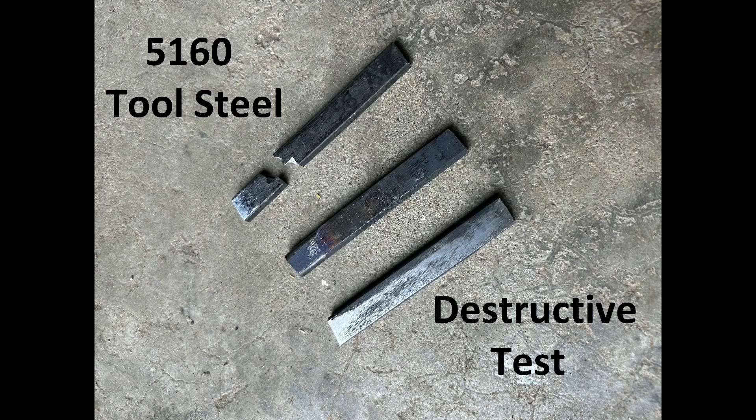Today I'm going to test out a preferred steel that I enjoy. I like 5160, an alloy steel, and I cut 6 pieces out of it. They're all going to be the same size.

They are all going to be annealed and normalized, and then I'm going to quench them in water, Parks 50, and regular canola oil.

So with those, after I quench these, I'm going to test the hardness after it's been quenched, straight quenched, and then I'm going to test each one after it has been tempered. The tempering will soften it a little bit but make it a little bit stronger.

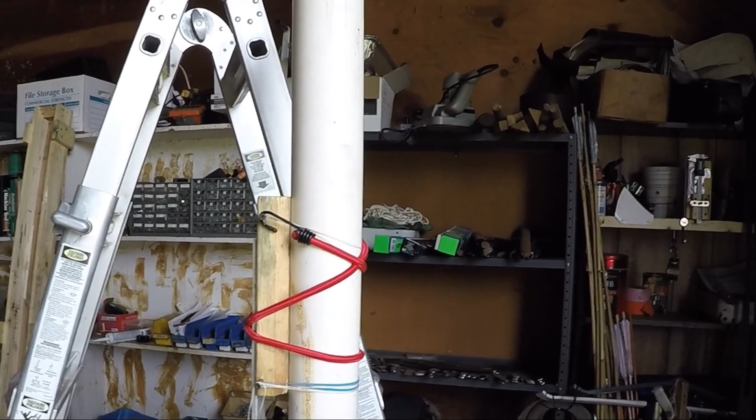After that, I am going to put it in a mechanism I tried to make here. This is just a PVC tube, 2 foot long. I can mount the steel here, and I'm going to put a 10-pound weight down the tube, and it'll hit the piece, and we'll see if it breaks, and then we'll analyze it a little bit more.

So that's the plan, and we'll go on to the heat treat part. We'll see you in a bit.

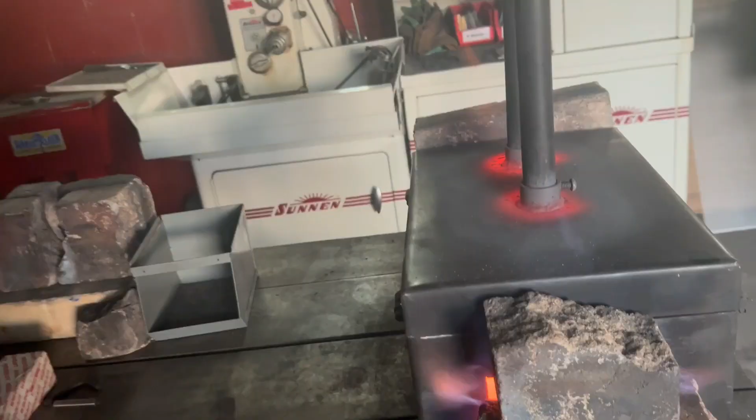We did a set of normalizing first, and now we're going to do it in anneal. We got our 6 bars in there, and we're going to let those finish heating up. They look pretty good inside there. Going to turn it off.

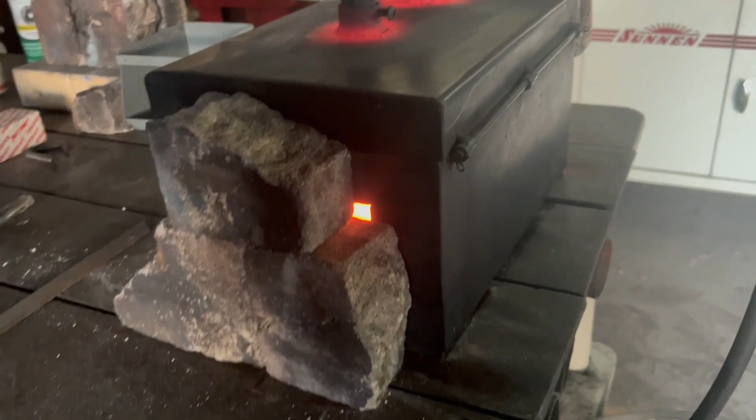We'll let that anneal, cooling it all the way down until it's room temperature, and then they will be annealed. And then from there we'll do some heat treat. So there's our annealing and normalizing process.

Normalizing: put it in, get it up full hot, put it out, let it cool on the table, put it back in, and then let this cool down inside the furnace so that it slow cools. And then we'll proceed to do some heat treat.

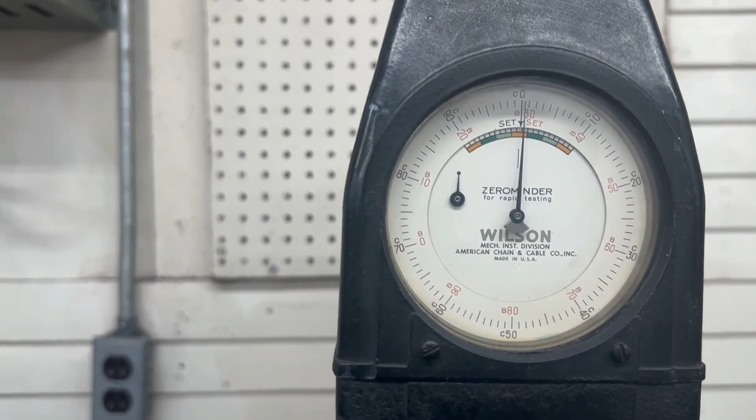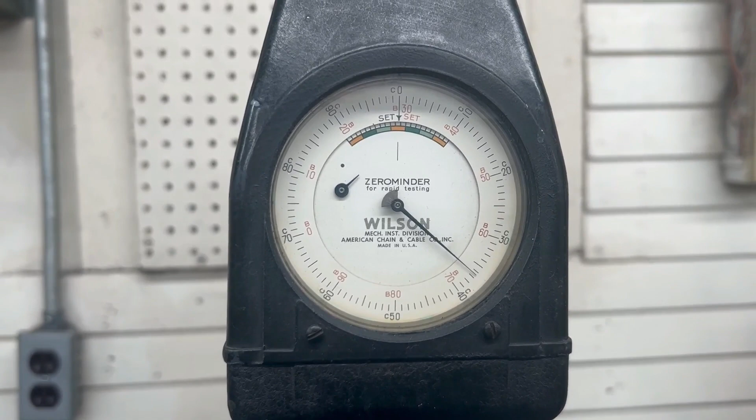So I annealed the 5160, and we're going to Rockwell test it right here. We're looking at about 36 Rockwell right now. That's soft enough to machine, and then we'll harden it up and see what it gets to.

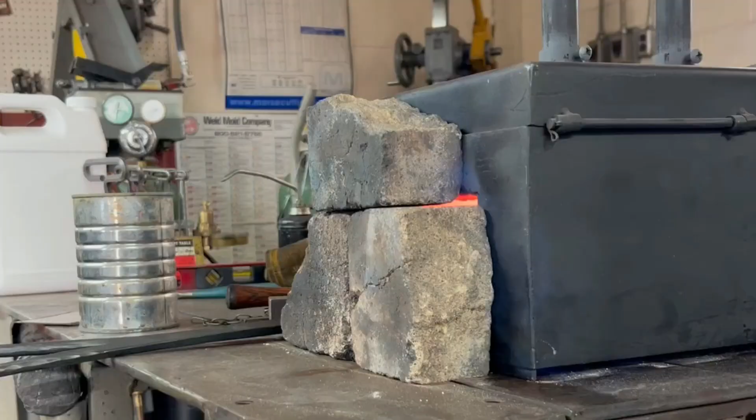Quenching in canola oil. Quench in water now. Gonna quench in Parks 50 quenching agent. Second one - check this one with a magnet to make sure.

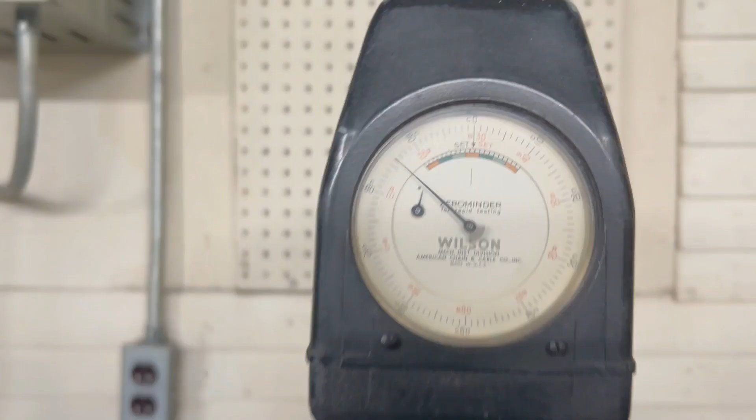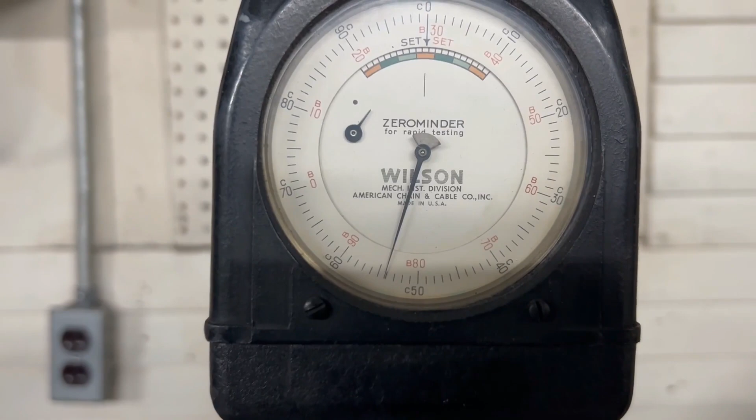Quenched in water, looking at about 58 Rockwell. Quenched in canola, looks like we got 54 Rockwell. Did the Parks 50 quench with the 5160, we're looking at around 58, 59 Rockwell as quenched.

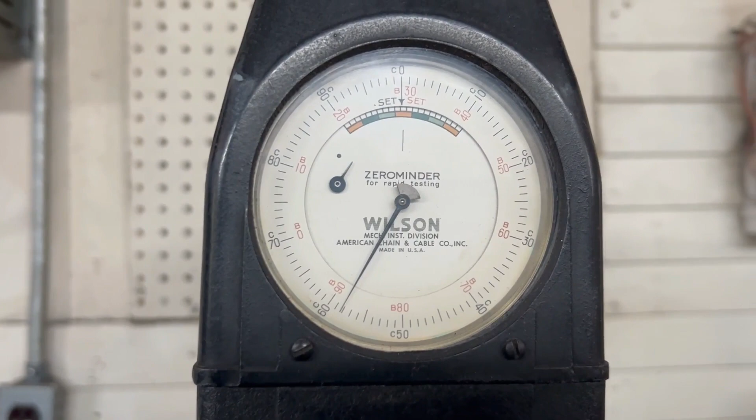Doing 3 sets of tempering at 450 degrees, 1 hour apiece, on the water quenched and the canola oil quenched. So we're going to test the Rockwell hardness after those are done in the tempering furnace.

375 degree tempering for the Parks 50 quench. You see there we got 375. And we'll give that one a good temper for 1 hour.

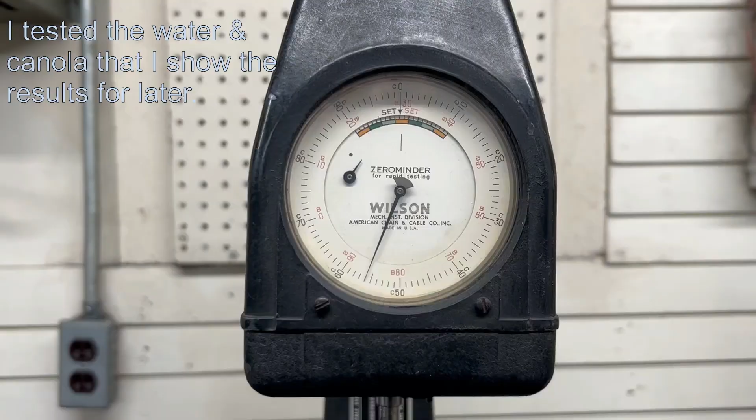Parks 50 after tempering at 375 in the toaster oven, I got a Rockwell of about 56. So that would be our end result on the Parks 50.

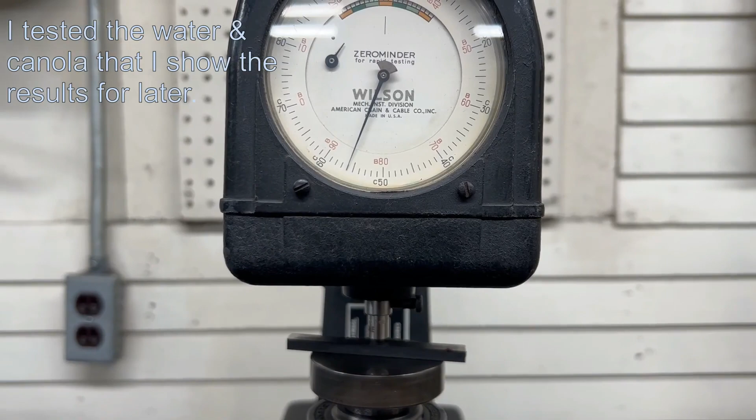So this is an overview of what we did. Again, these were water, these were canola, and these were Parks 50. Parks 50 is a preferred quenching oil that has a 7 to 9 second time for reducing the heat in the steel to get you the right hardness.

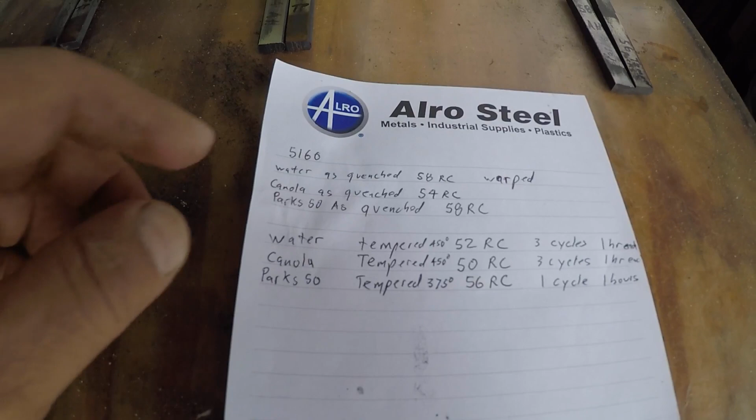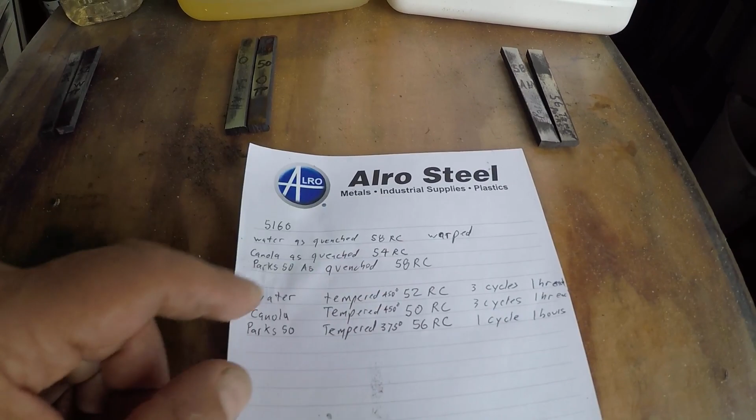So this is the data, if we'll be able to read this. The as-quenched water was 58, canola as-quenched was 54, and Parks 50 as-quenched was 58. The water warped, the canola oil didn't, and the Parks might have warped a little bit, not as much as the water. Water is not a preferred method for this particular steel.

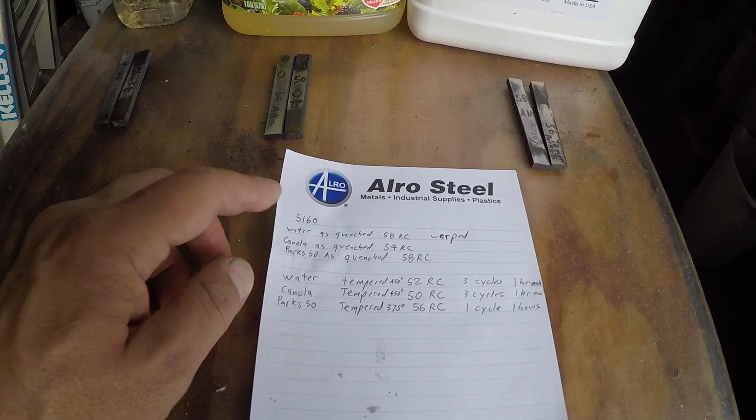5160 will crack or flex too much and you'll have problems, but I did it anyways just so we can analyze the differences.

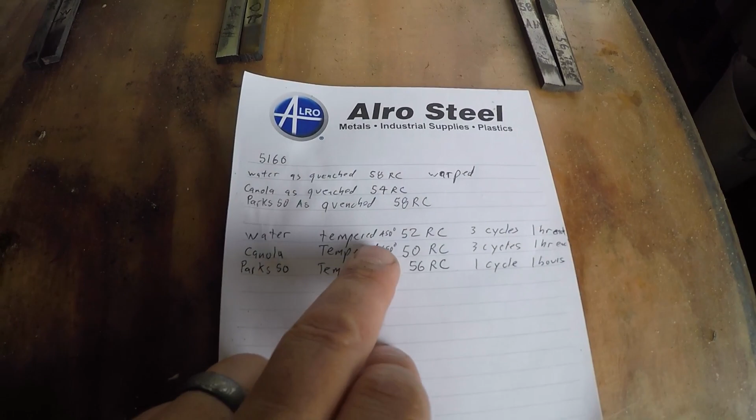Afterwards, I tempered it. I did these slightly different, but water I did at 450 and that ended up being 52, with 3 cycles of 1 hour. The canola tempered at 450 came out to be 50 Rockwell, also 3 cycles of 1 hour.

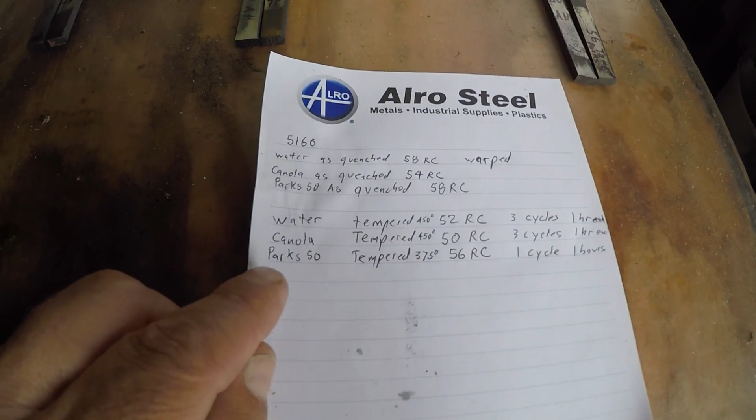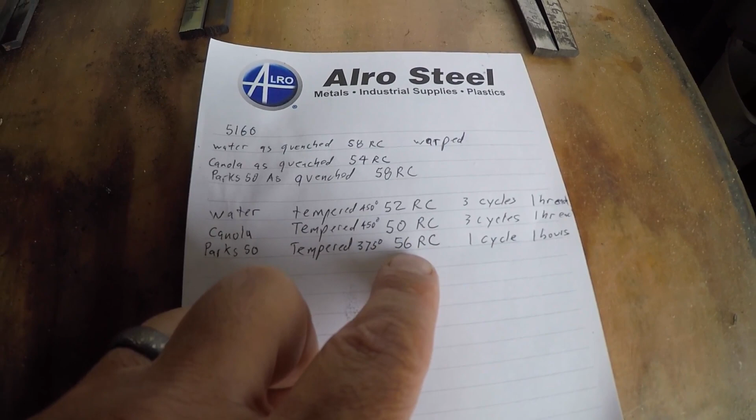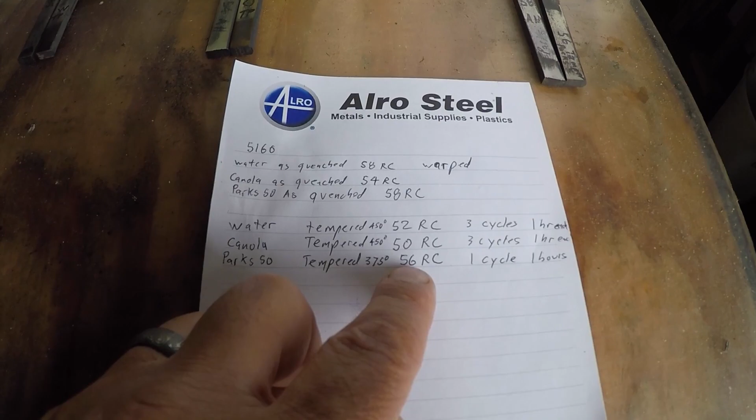I reduced everything to more reasonable numbers. For the Parks 50, I did 375, and that came out to be 56, which would be more of a preferred hardness for any kind of knife or machete. It's still a little bit low if you want a real hard knife to keep a sharper edge. I did 1 cycle on that for 1 hour.

But we're going to go back and we're going to test to see how all 3 of these break or don't break, hopefully, and we'll come up with that.

Okay, here's our first test. This is the water as-quenched without any tempering. Here we go. And we broke.

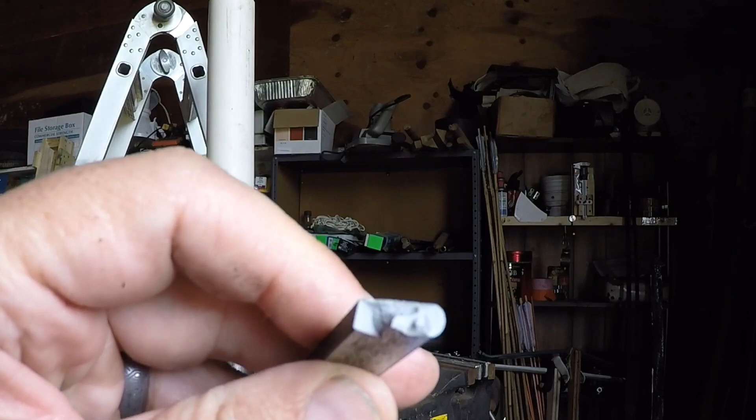So I will show you the grain structure on that. Try to get a couple camera angles so we can see it. I anticipated that one snapping off, and that's what it did. So that was the water as quenched, which ended up being a 58 Rockwell, and it snapped.

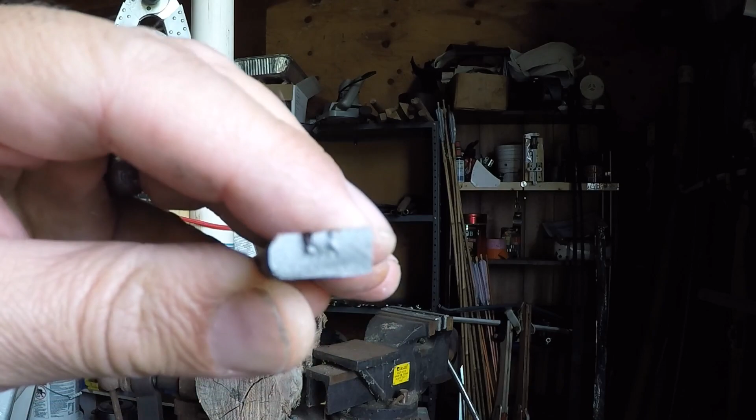We'll go on and do the next. This is going to be the water, tempered 3 times. We'll see what happens here. Again, we got it snapped. There's the grain structure on that one. This was tempered 3 times at 450, and that ended up being a 52 Rockwell.

This is going to be canola oil as quenched. Snapped off. And that is the grain structure on the canola oil as quenched.

This is canola oil tempered. Let's see how this goes. 2 pound and 10 pound weight. That one did not break. Get that one out of there, and we'll take a look at it.

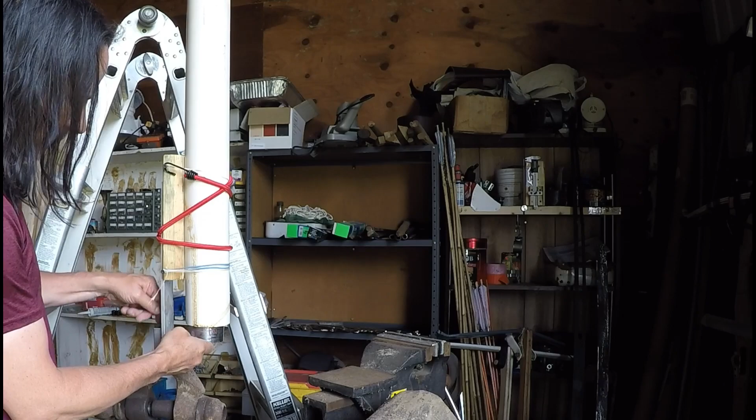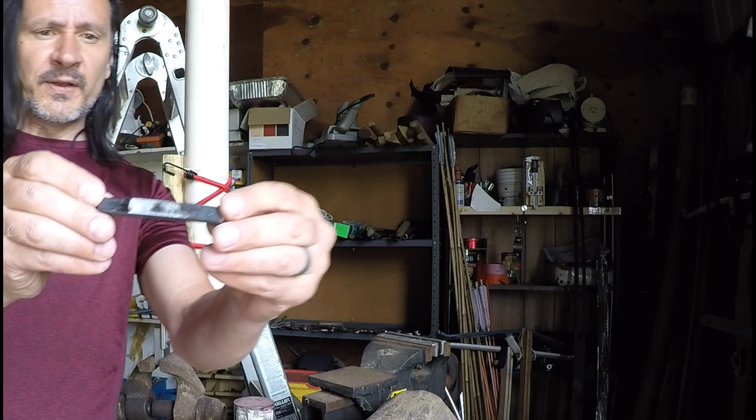So this was canola oil. It ended up being 50 Rockwell. And there is our 50 Rockwell. And that was canola oil.

This is the Parks 50 as quenched. There we go. Snapped off. I will show you the grain structure on that one. So that's the Parks 50 as quenched, no tempering. That's how that one snapped off.

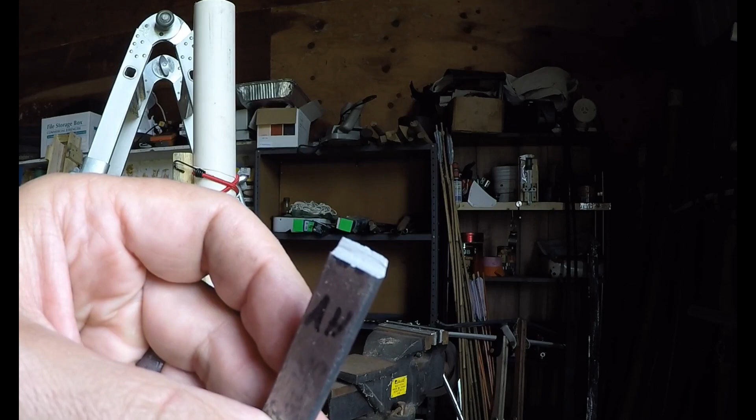And we'll do our last one, which is going to be our Parks 50 with one set of tempering at 375, which brought it down to 56 Rockwell. So this is the Parks 50 that is 56 Rockwell, tempered at 375 for 1 hour.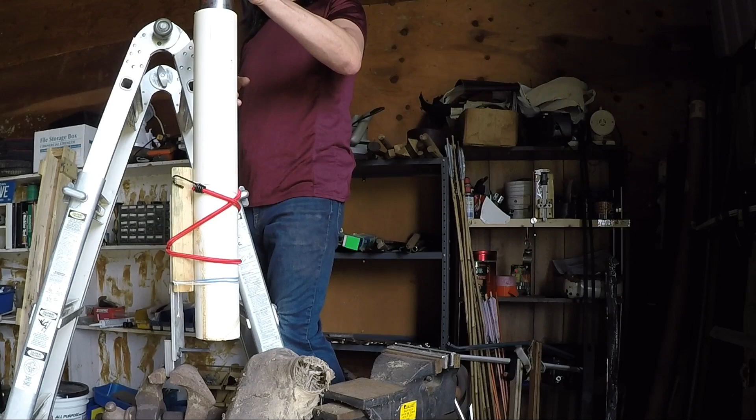Here we go. That did not break. Let me get that out and we will show you that one. So this is our Parks 50. Got a bend to it, but is not shattered. That was final temper on that, 56 Rockwell. That was 1 cycle at 375.

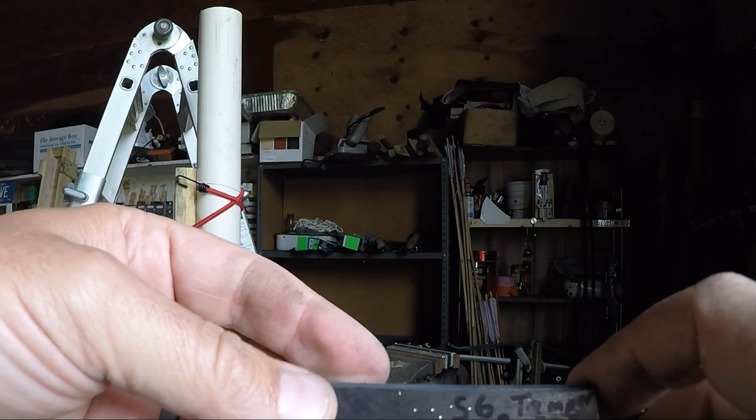So pretty rudimentary testing here. But like I say, both of our waters, this is 58 Rockwell, this is 52, as quenched and tempered, both shattered. We had our oil, which was canola, this was 54 as quenched, this was 50 tempered 3 times. This one is not broken. This one was broken. And then we had our Parks 50, which again is our preferred quenching medium.

There's a 58 as hardened and 56 tempered. So the success story was the Parks 50 had a higher hardening range of 56 that succeeded in not breaking, and actually less deformation. The oil, our canola, succeeded with a 50 Rockwell, and it bent a little bit more than the Parks did. But one, the Parks was a better quench.

Two, on this one, at that kind of Rockwell hardness, you're not going to have probably as easily a chance of breaking. But because of the preferred quenching style, I believe our 56 Rockwell, which this one was 52, this one was 54, those were both less than the 56 and both shattered. So in ending, I do believe we got a little bit of testing on how each quench style was going to achieve a result of me testing its toughness, seeing if a 10-pound weight smacked into it at the same distance every time for each test would see what would happen.

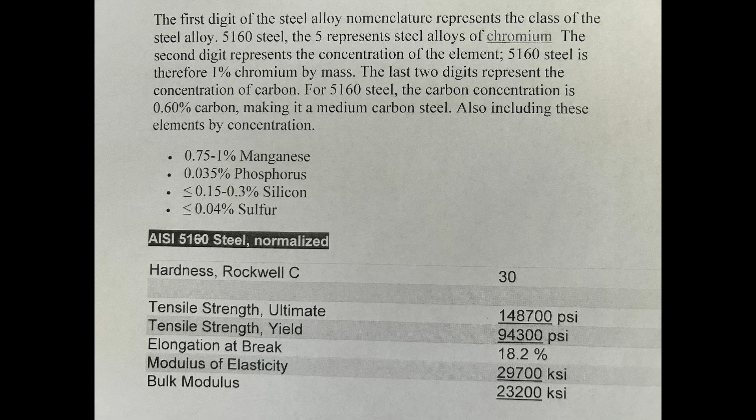And that's what I wanted to test. So I think it came out successful. I like what my results came out. I will catch you later, and I'll see you in the next video.